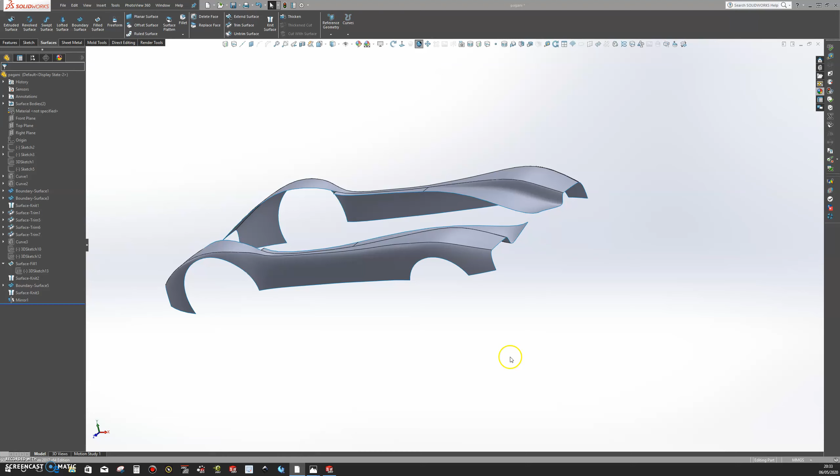So the next surface that we're going to create is going to be this surface here. So we're going to come all the way around here, and then we're going to come down and try to bleed into this slope of the back of the vehicle. So let's do that. Let's go over to our default display state, and let's make a sketch on the top plane.

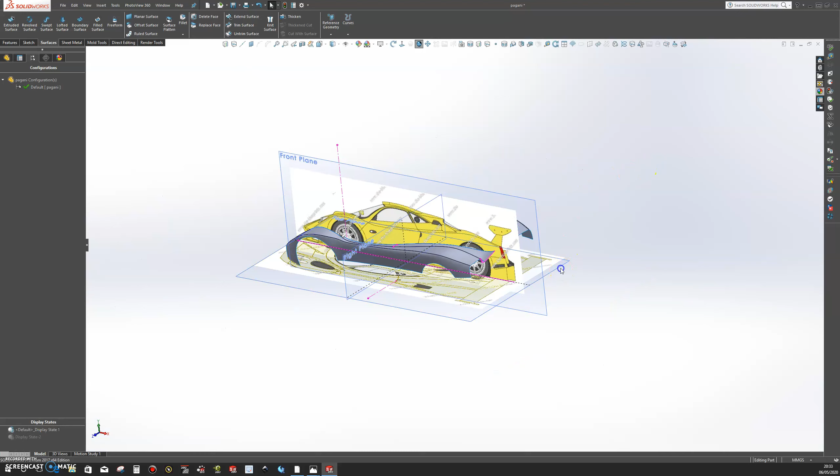The line we're going to get is going to be this line here, and this line, and it goes all the way touching this edge here. So let's grab this line, and then we're going to sketch. Let me just have a look at that area there. Right. Okay, so this edge is in line with this edge, so let's try to follow that line.

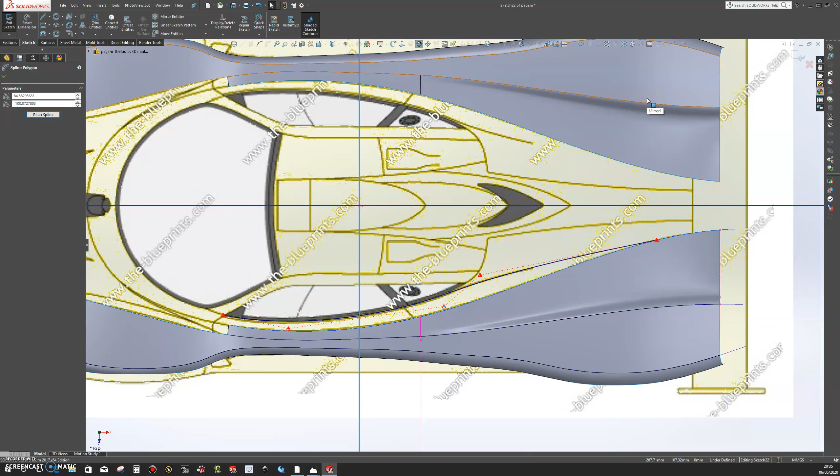So we're gonna sketch from this edge all the way back here, and let's grab this line and grab these handlebars and just put them into shape. Okay, and pull this up here. That's it. About there. Let's keep on our lines. So I'm happy with this spline. So let's exit this sketch.

Let's make another sketch on this plane. And this spline is going to be this edge here. Okay, so our first sketch is about there, right underneath this corner here, somewhere about here. So it falls back, so I'm gonna come all the way out here somewhere and start the sketch from here and just follow this line,

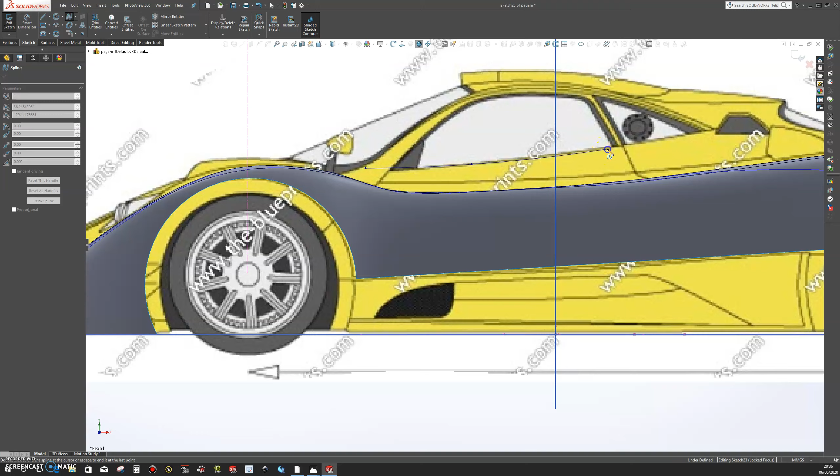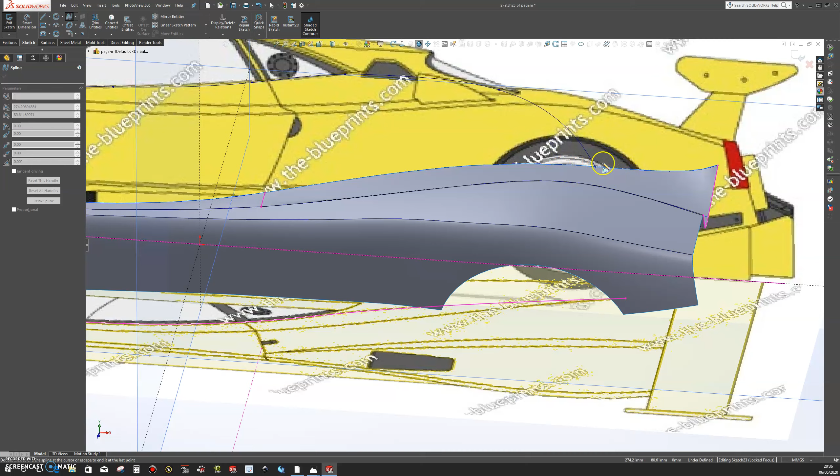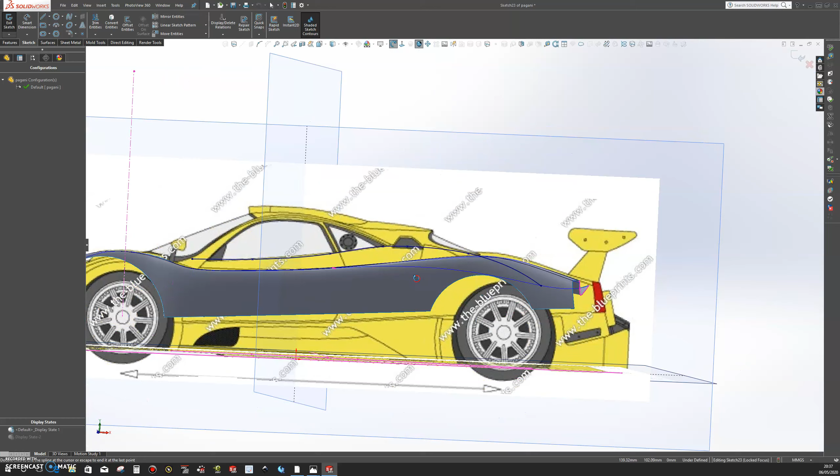and then we're going to come down about this point, and then we're going to try to grab onto this edge, right? So that edge right there. So let's go all the way about this much and grab onto that. So that's good. And let's go into this spline here and grab these handlebars and just make sure that we have the shape that we are looking for. It goes around like that very nicely.

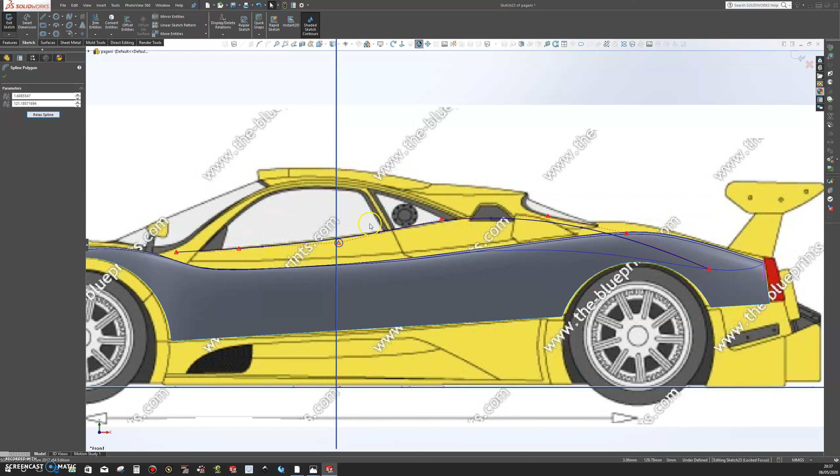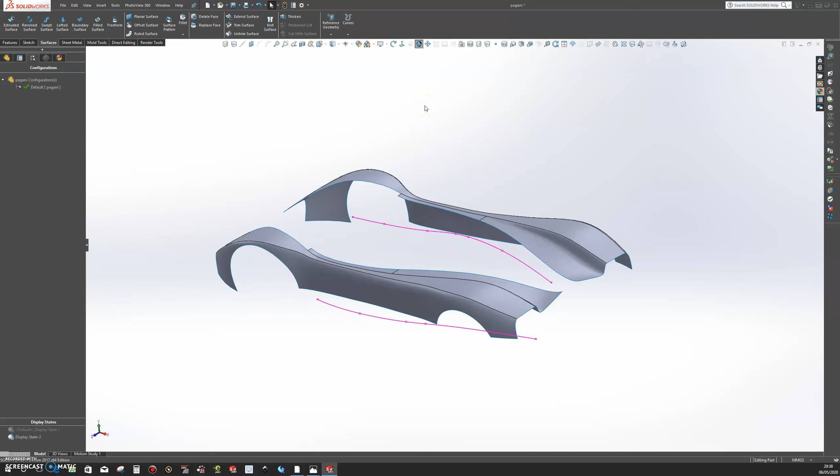And we can pull this down a little bit, just to about there, and bring this up a little bit like that. Okay, so I'm quite happy about this spline, and let's have a look what it gives us. So exit this sketch, and let's go over to our second display state. And then let's create a projected curve out of these two curves.

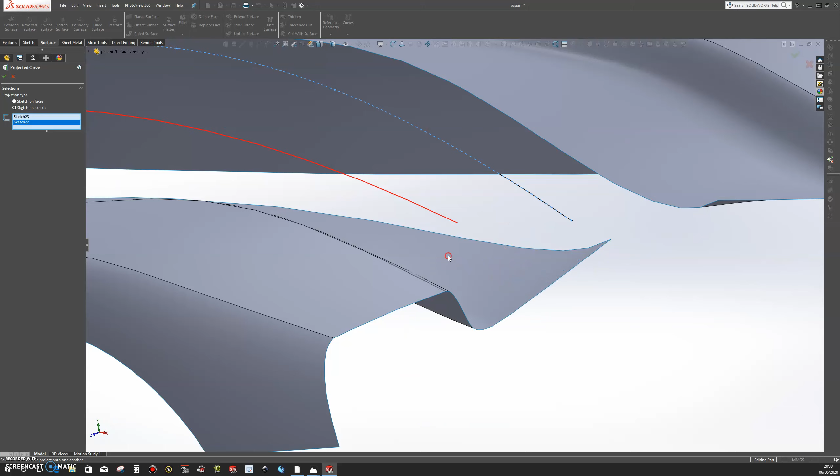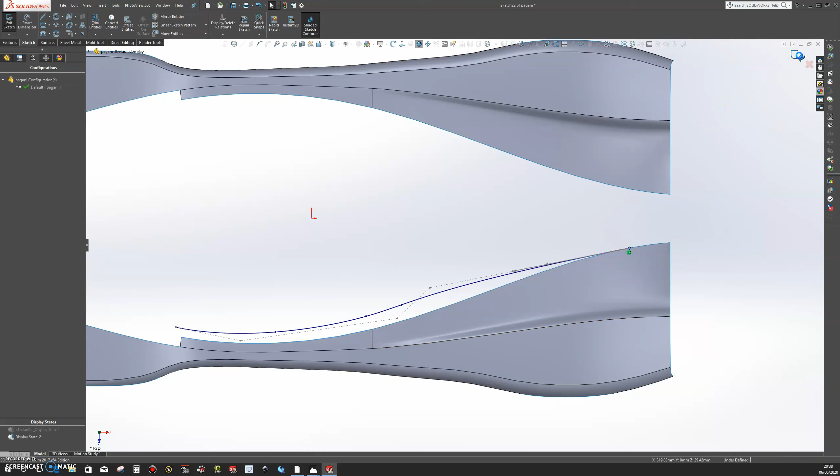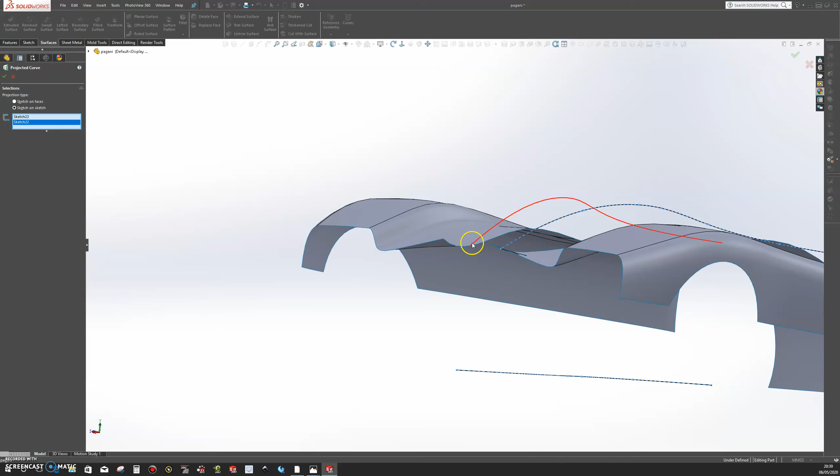So that's going to be our curve. And we can extend this lower line first before we press OK on that. So let's edit the sketch, and then let's just pull it a little bit back. And let's have a look at our 3D curve from this and that. It already looks a lot better. So it goes all the way down to the edge. So I'm going to press OK on that.

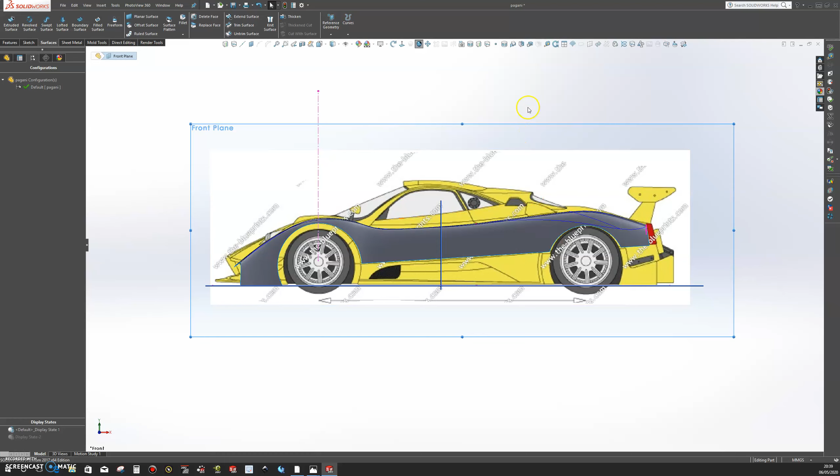I'm going to bring back our default display state and make a normal view and check our 3D sketch if it's lining up. It's lining up this way. And let's have a look at our top view. It's perfectly lining up that direction. Let's bring up our sketch image. So it goes quite high up here and then goes that way down. We can always trim off of it if it's not what we're looking for. So let's go back to solid here.

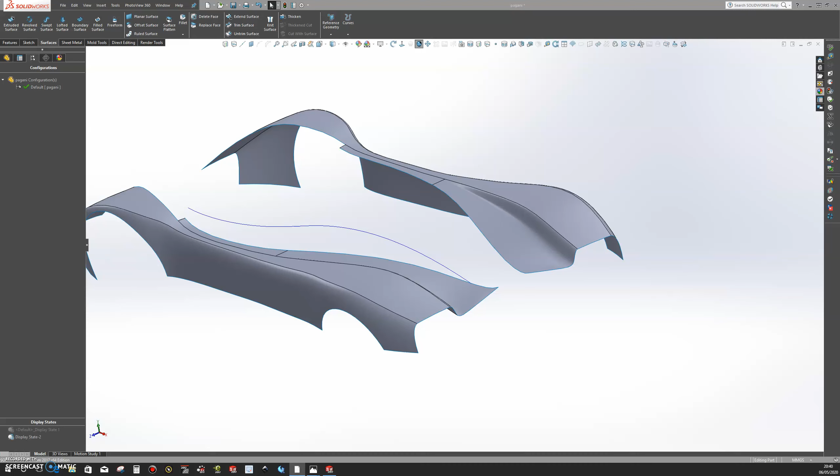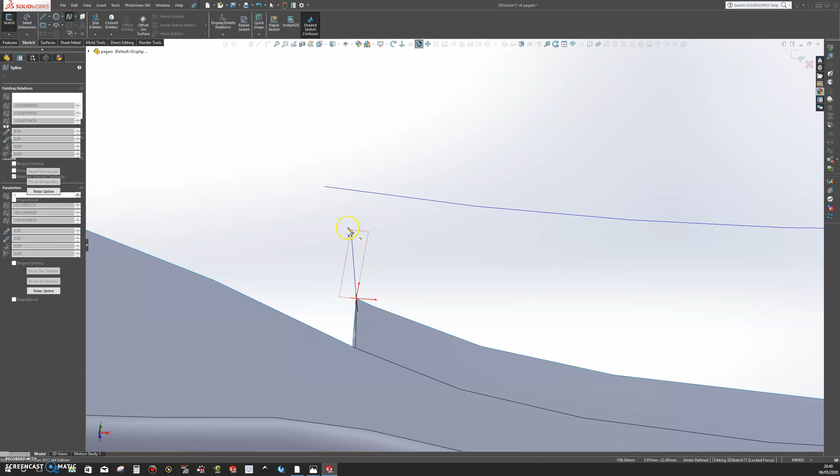Next thing we're going to do is add some 3D curves in this direction to add a little bit of shape to this curve. So the first curve that we're going to add is going to be from, let's go over to our 3D sketch, grab our spline, and let's snap from this corner to this line. Let's get a top view, and let's get straight with that one there.

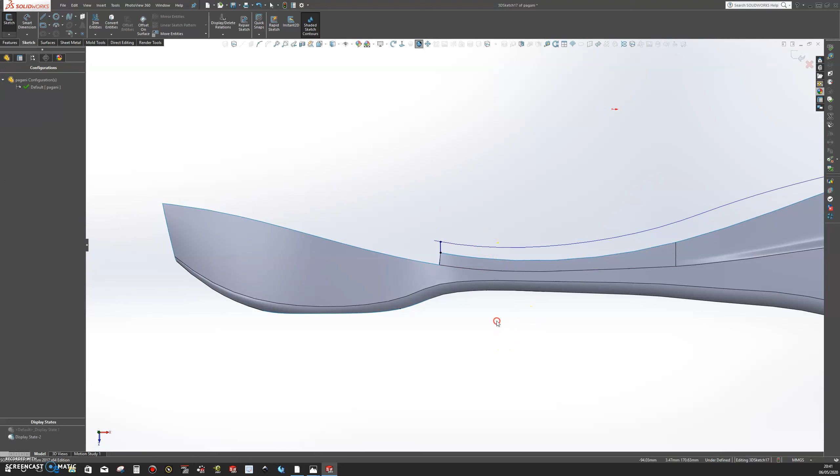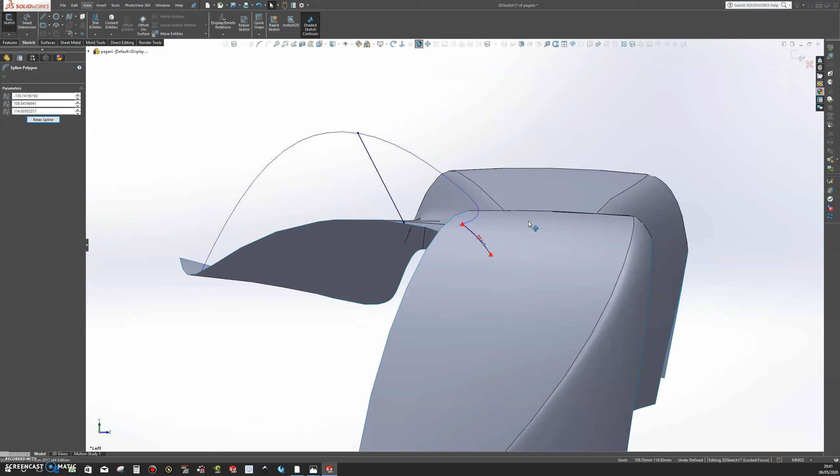So that's fine. The second 3D curve we're going to add is going to be back here to the line, and we can go into this view here and add some shapes to these curves. I don't want to add too much. I'm going to add about that much to this one, and about this much to this one, and then let's see how our surface will look. Don't want to introduce too much curvature to this one surface.

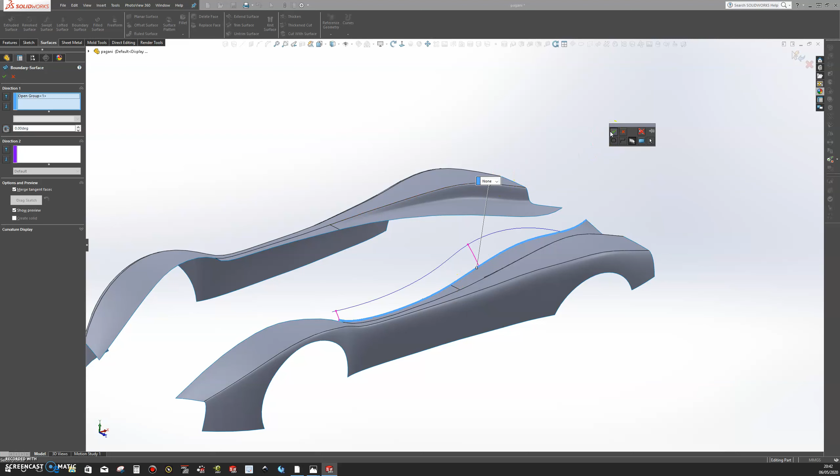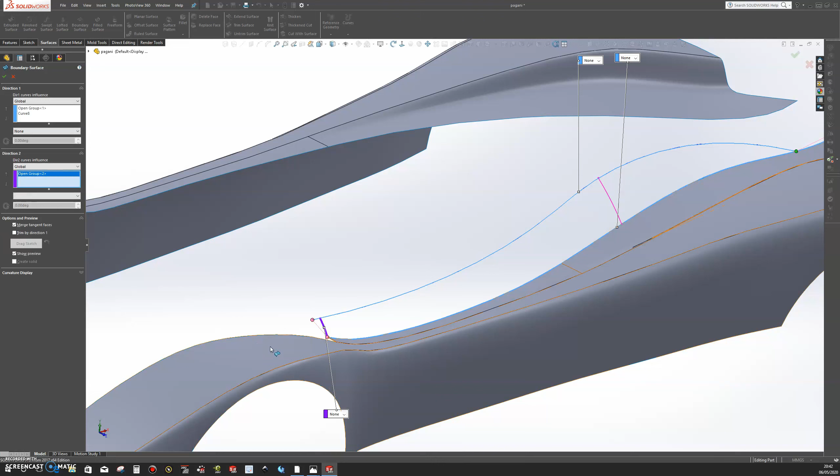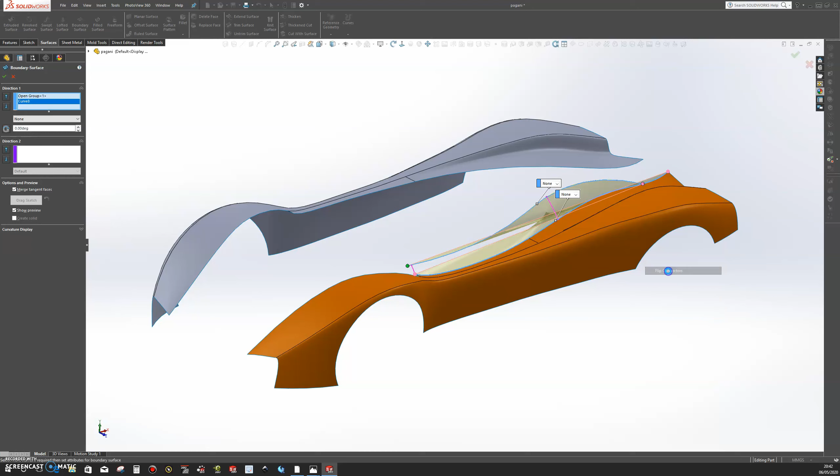So let's go to surfaces, and let's try a boundary surface with selection manager, and let's choose this line and that line, and then second line. Let's flip these connectors. Flip on the pink, flip the connector, and then let's choose our guide curves, which is this one, and our second, hold on a second. Boundary surface, selection manager, let's choose this line and this line, and this line. Flip, and let's pull back this connect point to that point.

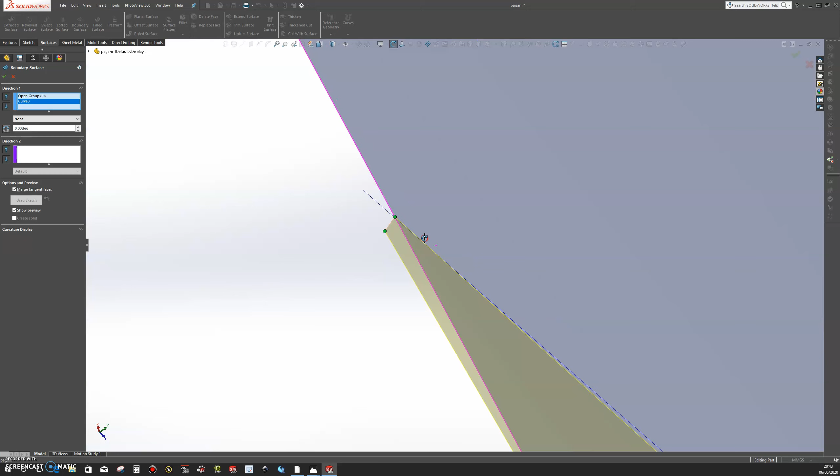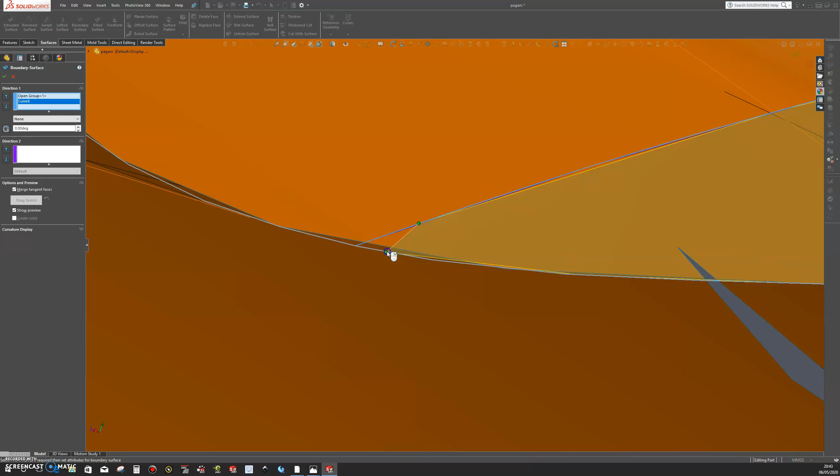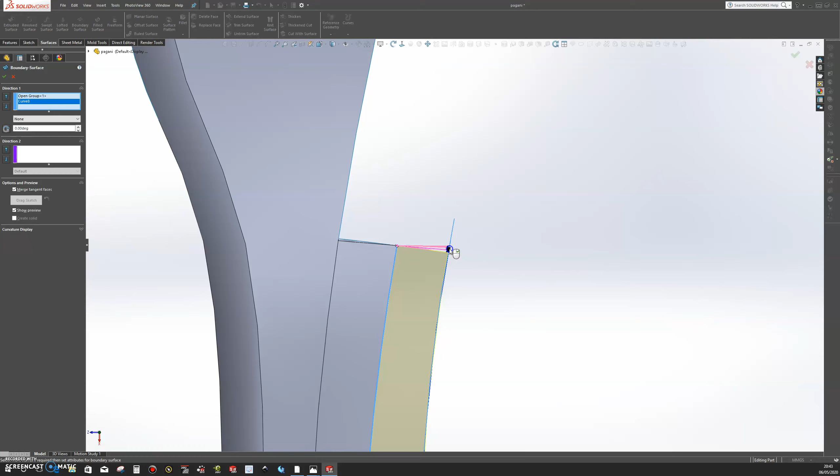Okay, and if we come in here quickly, let's see these lines, how they're lining up. I'm gonna pull these lines up to about that point, a little bit higher. And then I'm gonna come in here and get a top view and pull this corner point to that point right there. Okay, and that's the point we're looking for.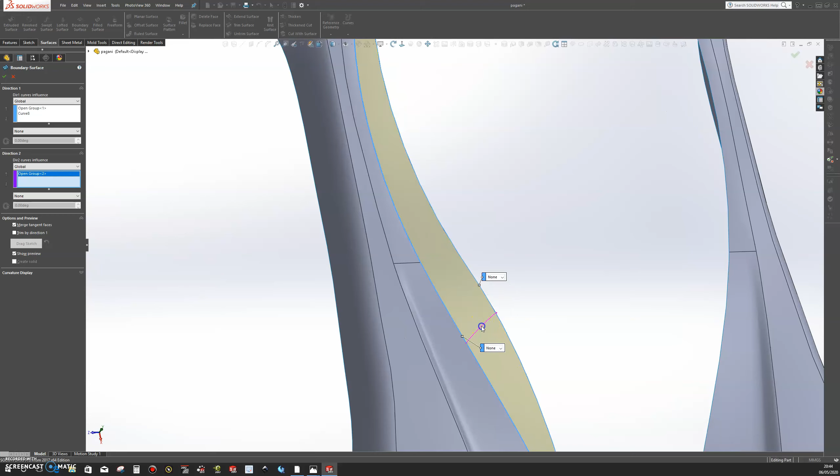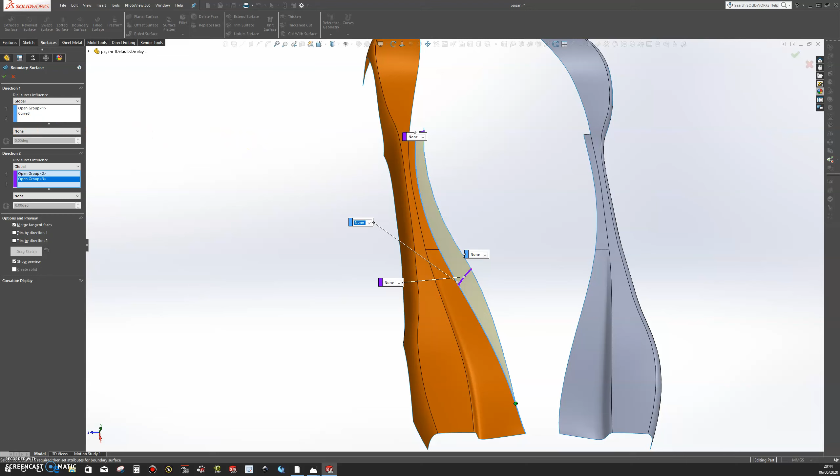Alright, so for our guide curves, let's choose this one and press OK. And for the second guide curve, this one here, and press OK. And we're going to leave this one as none. If you added a tangent or a curvature to face, it would create something out of order. So let's click on check on this and see our surface.

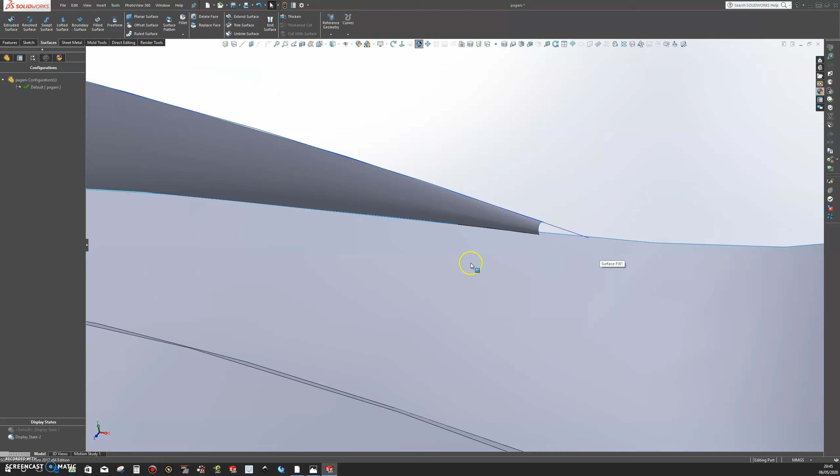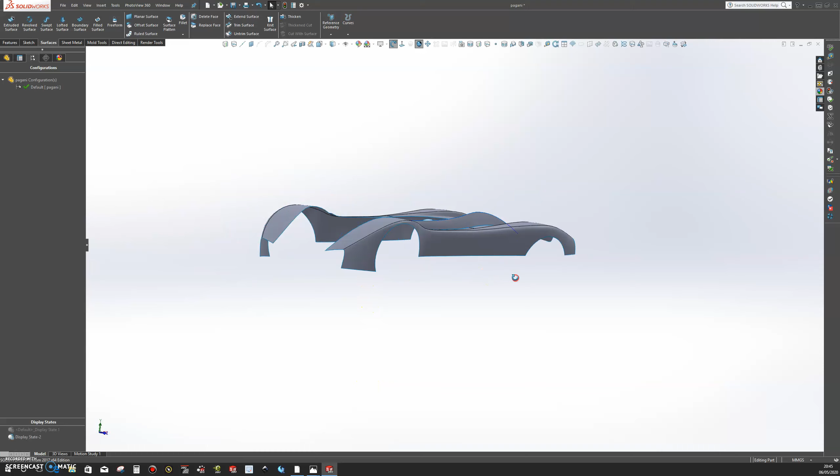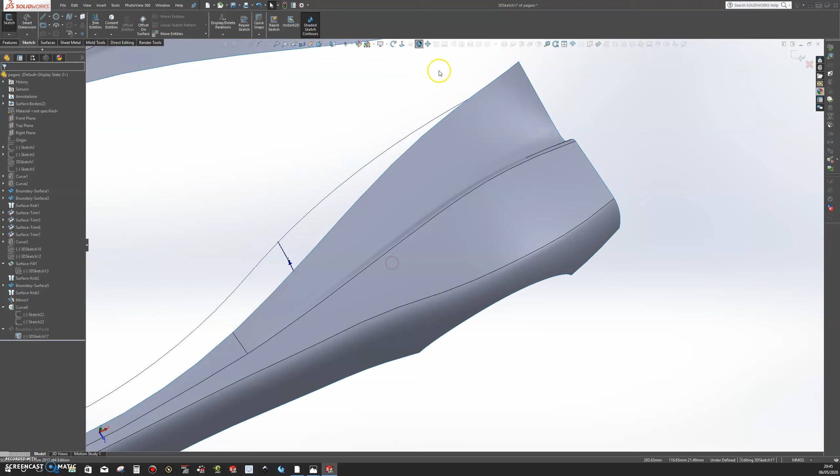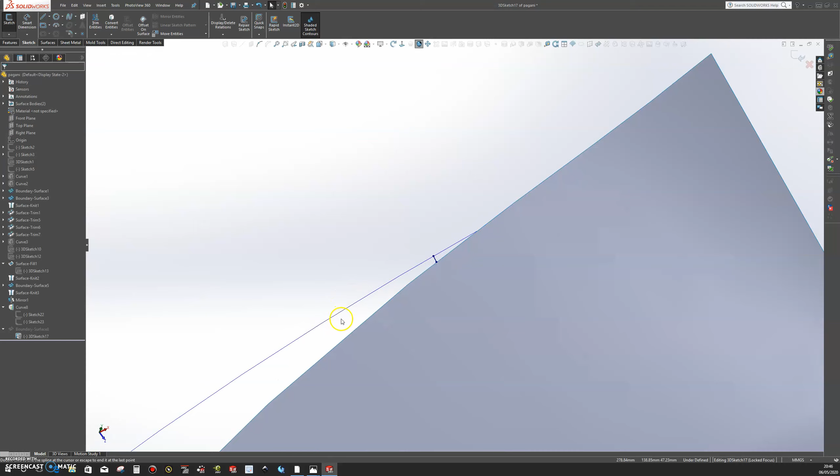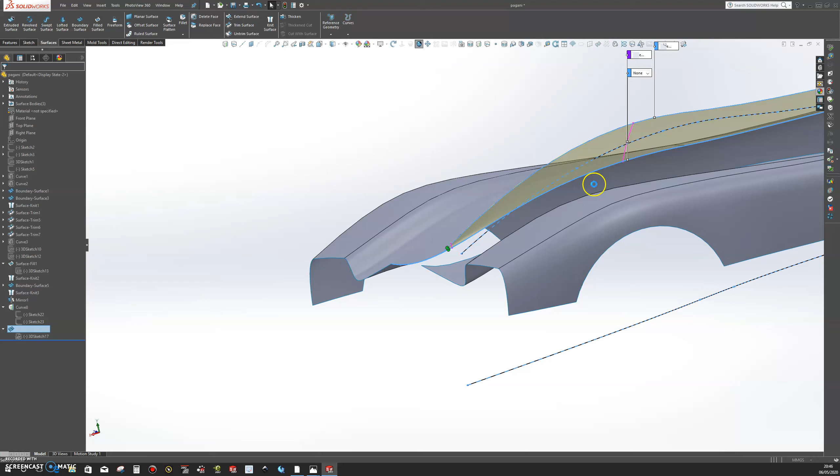And pull this and delete that actually. And let's grab another one from this edge, this line. Let's just pull it back somewhere about there, and leave it in this area. Let's exit this sketch and go back and edit our surface. And let's add this line to the guide curves as well. Then let's press OK on that. Okay, now it looks a lot better.